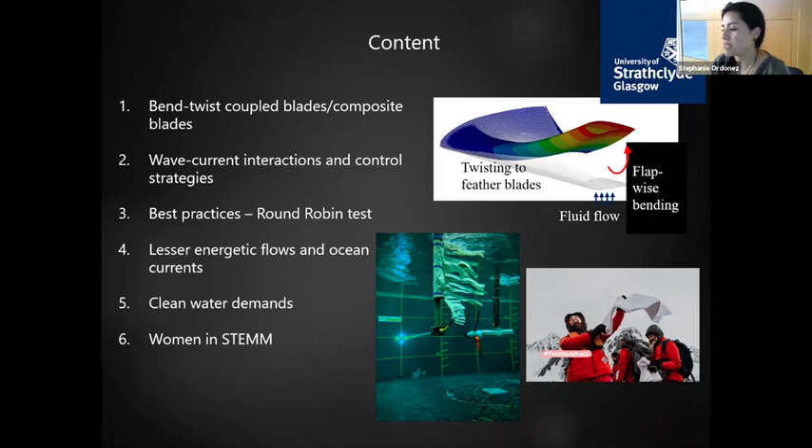So, okay, I guess this picture summarizes what I basically do. I do my research in marine renewables. It's pretty much experimental analysis and optimization of hydrodynamic performance of tidal stream turbines, but also looking at the structural reliability of the devices.

As some of you know, and from what I've heard, I think most of you are in ocean sciences or engineering. There's a few ways that we can convert the energy from the tidal stream or currents to mechanical, electrical energy, right? I work primarily with horizontal axis turbines, three-bladed ones, and we've used a few different ones to assess aspects like dynamic loading and performance, changing the blades, trying to modify them to meet different aspects of what we're trying to achieve.

Well, this is basically what I'm going to talk about. I'm going to start first with a project that we had with a researcher that is now actually at NREL. Dr. Murray did her PhD at Dalhousie, but also in collaboration with Strathclyde University.

Basically what she did was a model to test bend-twist coupled blades. The idea is that instead of having a normal rigid carbon fiber blade or aluminum blade, we are allowing the blades to flap and twist a bit on purpose. In that way, we are trying to shed the load, to increase the reliability and the life of the blade, but without losing a lot of power.

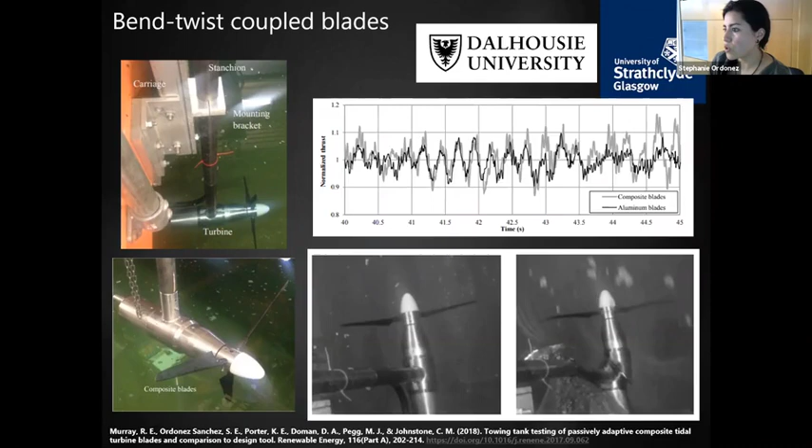This is some of the initial work that we did with Robynne on her bend-twist coupled blades. These blades were filled with epoxy, and it was just some carbon fiber plate. Then we wanted to look at how these blades were operating in wave-current interactions, but also with turbulence.

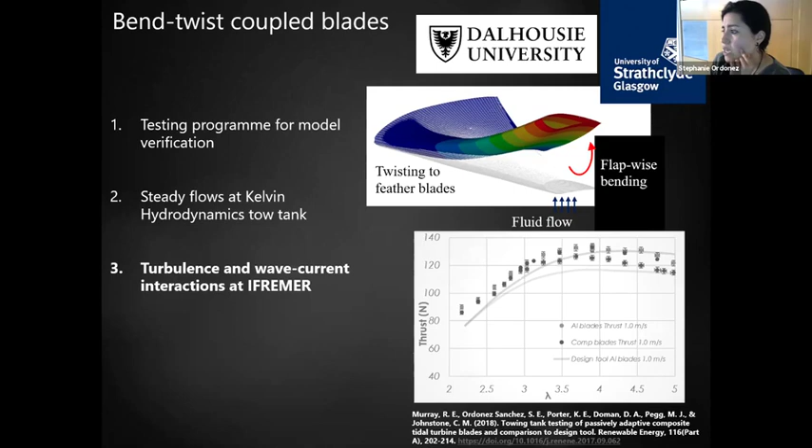For this, the Kelvin Hydrodynamics tank was not the best, because you don't have any turbulence, although you have a very clean wave that you can create, as some of you might know from the tank in your university. So we went to Ifremer, and these are the parameters that we used. Ifremer is a facility in France, in a very nice place called Boulogne-sur-Mer.

If you go, you have really nice French food.

The parameters that we were trying to characterize the turbine with were different wave heights, different levels of turbulence, and different flow speeds. But this is something that we have learned with time. At that time, at Ifremer, there were not a lot of experiments done with waves, and actually the tank is a bit limited when you do waves and currents there.

So we had to set our parameters to a flow speed of 0.8 meters per second, a very, very small wave height of 0.15 meters, and a frequency of 0.5 hertz. So at big scales, it's actually, I think, I don't remember, maybe 1 meter of wave height or something like that. It's not much.

But anyway, that gave us a bit of an insight of what we wanted to get out of it. Again, we want to look at the dynamic loadings on the rotor, but also the change of performance that we can get from a rigid blade compared to a bend-twist coupled blade. And you can see here that the turbine is only 0.8 meter in rotor diameter. And at that time, at Ifremer, they have this LDV.

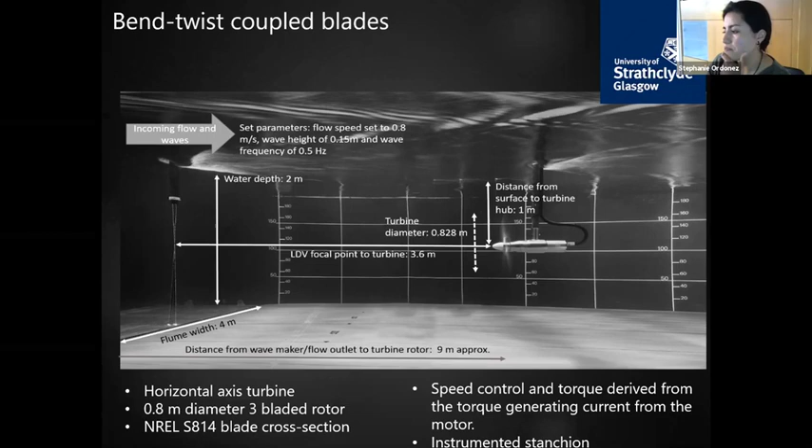And this might not seem the best approach, because the LDV was quite far away from the rotor, but it was something that we were testing, trying not to affect the flows very close to the turbine. And I will discuss this a little bit more later, because it's something that maybe some people working in marine renewables have encountered, that there's not really a lot of best practices of how to go around these issues.

So anyway, these are the results that we got. Basically, you can tell again that you get lower thrust using the composite blades and a bit more with the aluminum blades. And these are the data that we get from the wave-current interaction. For every wave period, we were looking at the fluctuations of the thrust and torque, and the thrust range, so maximum minus minimum of the dynamic loadings, was lower with the composite blades, but also the torque.

And I think it was very difficult to see the advantages of the composite blades at such low velocities, because we did some other experiments at higher velocities, and we could see more the changes on the thrust, so how we were shedding the thrust loading from the rotor blade. We didn't do more experiments, because at that point Robynne hadn't finished her PhD and she was afraid that we were going to break her blades. So we stopped there, but that gave us good parameters of what else we could do.

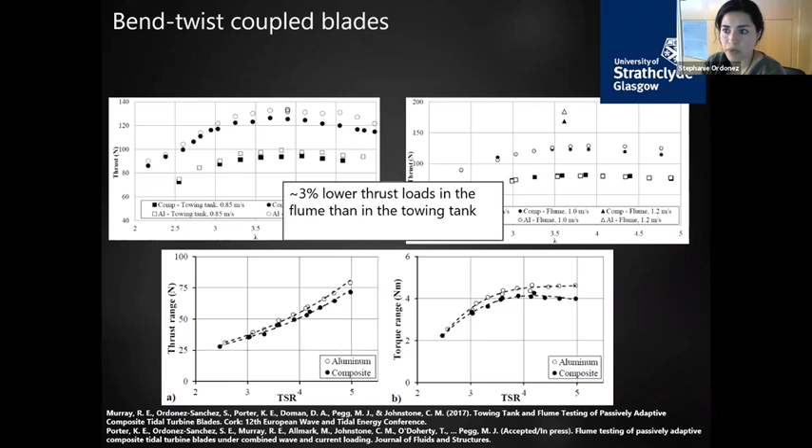We continue work with Robynne. Now she works at NREL, and I will present a bit more on that. She now works with thermoplastics, so that's another area of work that we're currently looking at. So that was a bit on the bend-twist coupled blades. And now I'm going to talk a little bit about hydrodynamic loading on rigid and composite blades.

So this is something that we wanted in parallel to what Robynne was doing, and also to feed into a project called ARICASM at that time, funded by EPSRC, one of the organisms here in the UK. What we wanted to do is a pressure map of the blade, of how the fluid affected the stresses on the blade. Now you can do that with computational fluid dynamics, which is very expensive.

So instead of using computational fluid dynamics, like 3D large eddy simulations or stuff like that, what we tried to do is couple blade element momentum theory with CFD. For those of you who are not familiar with blade element momentum theory, it's a very simple analytical technique where you get the performance of the blade through the computation of thrust and torque.

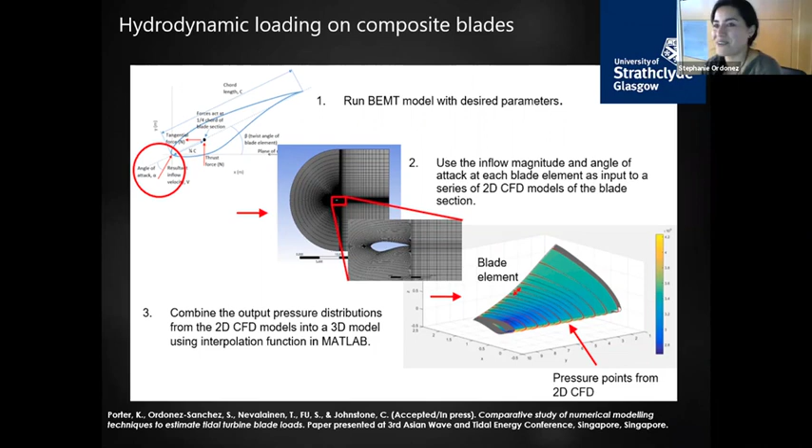But anyway, so this is another area that we were looking at, and what we did is basically get this pressure distribution along the blade, and we compare this. Roughly, we verify it with this. We loaded the blade, and we were getting some surface strain mapping.

So this was done in collaboration with Newcastle. They had the surface strain mapping techniques, and we were just comparing a bit roughly what we were getting in the model and what we were getting in this carbon fiber blade that we had from ages ago when we were testing a turbine that was developed at Strathclyde University. So I'm not sure if you guys are familiar with a contra-rotating marine current turbine. It's called CoRMaT.

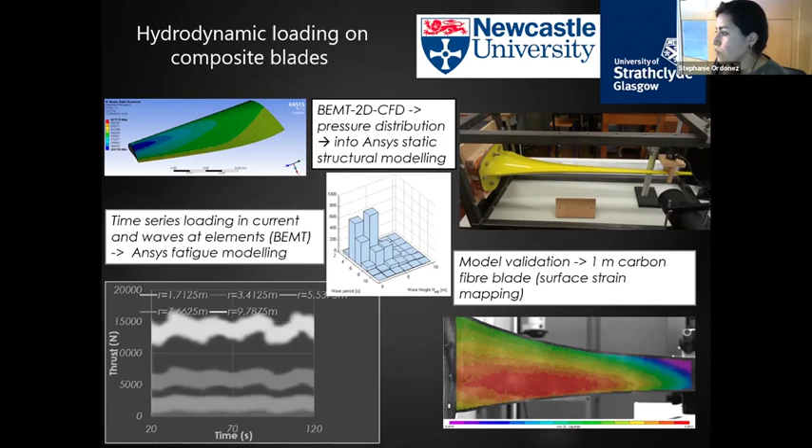Sorry. And then, so basically we did that work with Newcastle, and we came up with these models. And I think, well, they look nice, no? I don't know if this is very useful, but they look at the different pressure distribution along the blade. So basically this is a hollow blade with a structural support, you can see here. And what we are fitting into the model is a regular wave, and it's only 2.6 meters of wave height and a period of 6.1 seconds.

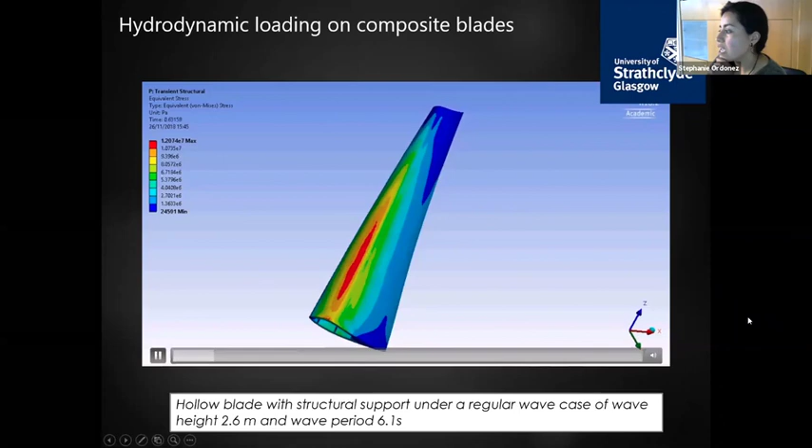We did a more extreme case, which is again the same blade, but this is under 10 meters of wave height and a wave period of 10.06 seconds. So obviously this helps you to look at more like fatigue analysis of blades and looking at different compositions of materials, like glass fiber, carbon fiber, different layers, different directionality of the fibers, and so on.

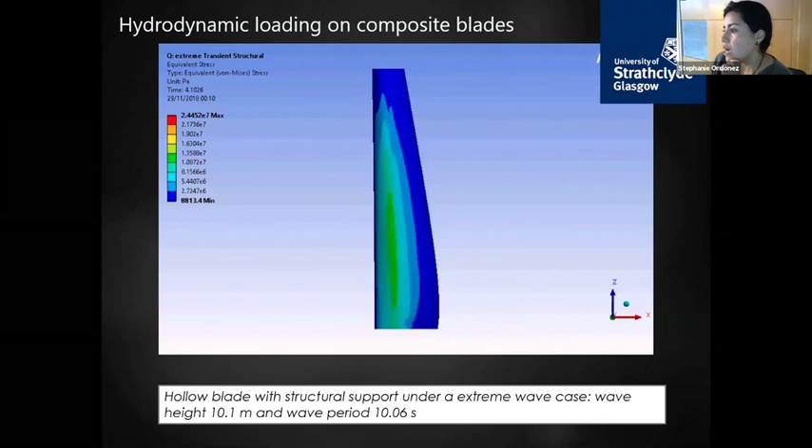And basically what I was telling you about was an extension of this work that's been done with NREL and Cardiff University as well. So we were looking at the use of thermoplastic resins, and this is basically just to improve the saturated properties, and the mechanical properties can be recovered after being dried, and also the recyclability of the blades. So there's a lot of now life cycle assessment, carbon footprint, and what we can do with this when basically the lifetime of the blades expires.

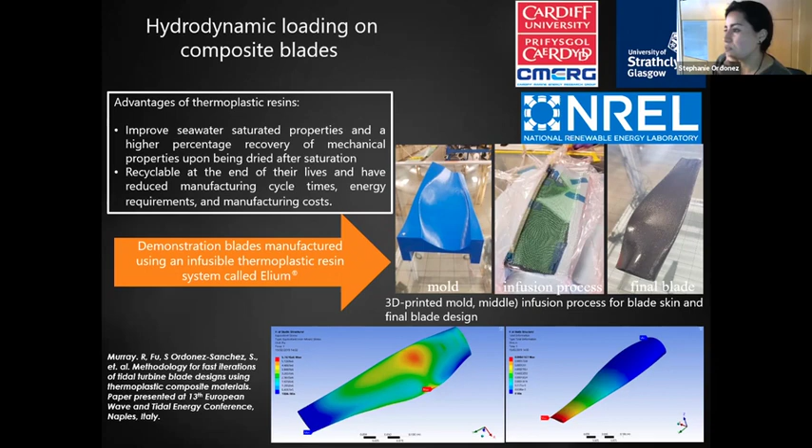So there's actually some work in Strathclyde University of one of my colleagues who's looking at the recyclability of carbon and glass fibers. But this is something that we are doing with Robin, and in fact we were going to test some of these blades, but the COVID situation happened, and now we have stopped a lot of our experiments that we had planned for last year. But anyway, that's my excuse.

And well, I'm going to talk now a little bit about this project that we had in collaboration with Cardiff University. It was a 4-year project called DyLoTTA, and basically it's called dynamic loadings in tidal stream turbines. So the idea of this project is basically, again, assessing dynamic loadings of an array of turbines, actually. So for this project, we had 3 turbines, again, horizontal axis turbines. We developed this blade, which is based on a Wortmann cross-section, and again, three-bladed rotors, but differently from the turbine that I presented before.

This is better instrumented. So basically what you can see in this diagram, we have a load cell here that measures thrust and torque behind the rotor. And again, we try to avoid any parasitic loads of friction or so, try to get as real data as possible. We have all the bosses where the blade sits on. They are also instrumented with strain gauges. And we are measuring here axial and tangential forces for each of the blades. Now, we also have the encoder, and we are able to use the 2 control strategies. So speed control and torque control, which is something that we also wanted to look at in this project.

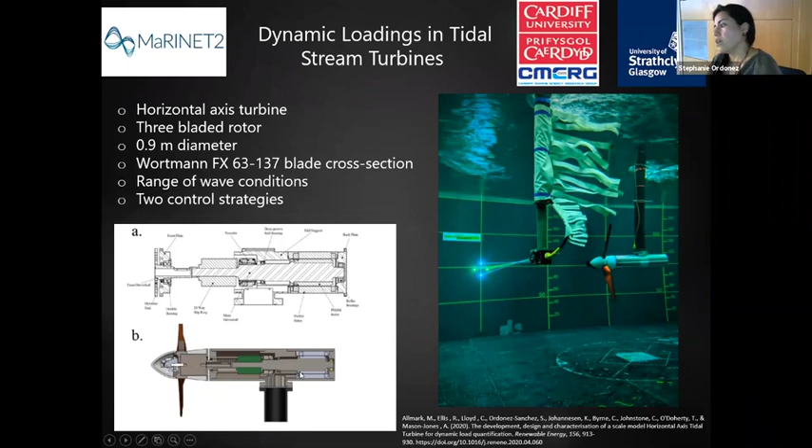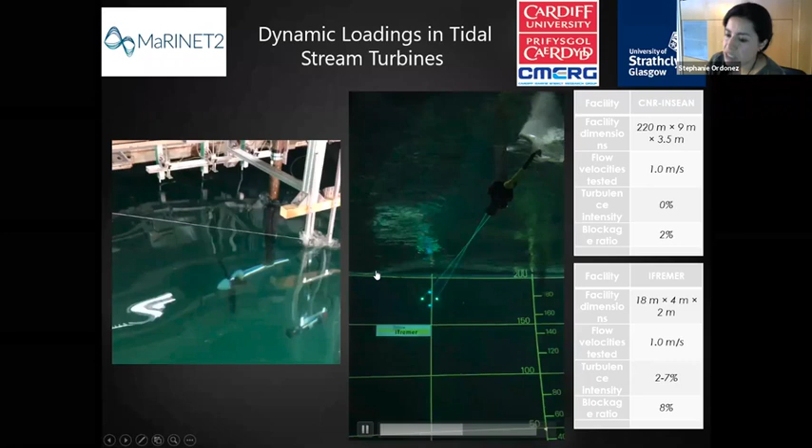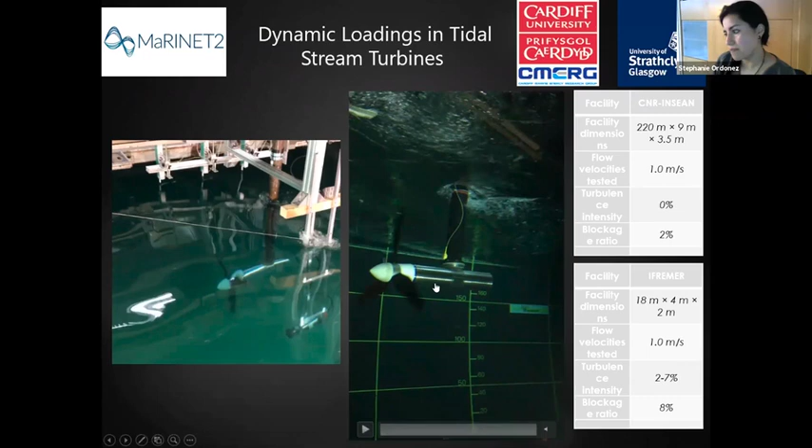So in this one, again, you can see here the waves that we were creating. Obviously there's advantages and disadvantages of using these 2 facilities. On the one hand, you get more realistic flows in the flume rather than in the tow tank. But then again, you have some limitations in the flume tank that you don't have such clean data as what you get in the tow tank. But I guess it really depends what you want to get out of it.

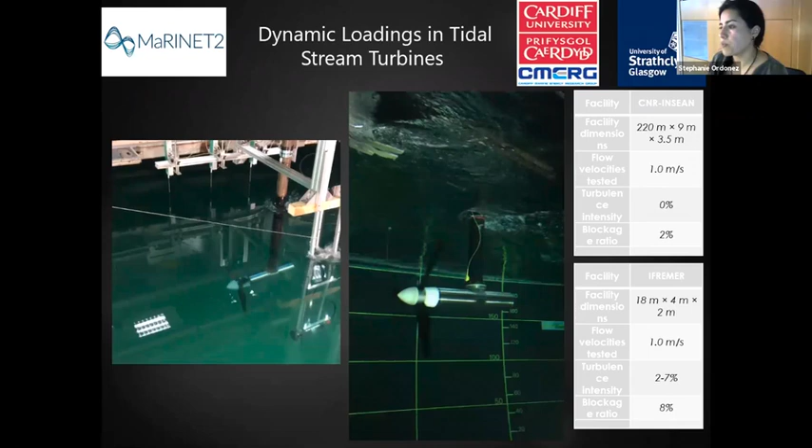Again, as we were expecting, we see an average thrust range increasing with the wave height, but this was seen much more with the torque control, and these are at the same operating conditions.

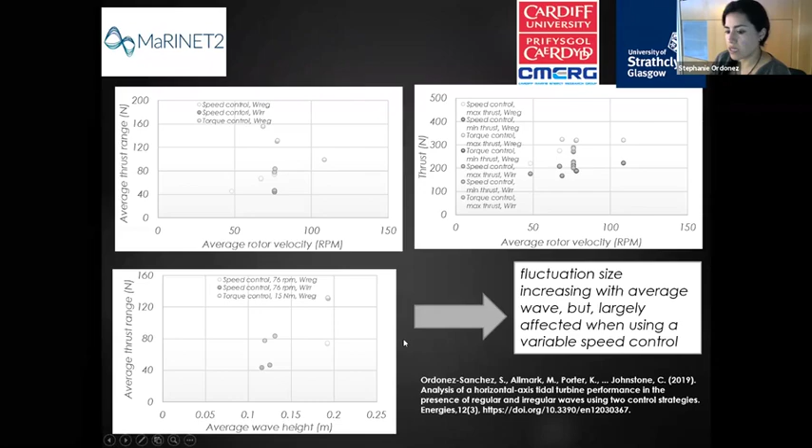This is another aspect that we were looking at, which is the phase difference. So basically we saw a phase difference between the surface elevation, so the wave, and the thrust loading. And what was interesting, obviously we get the phase difference for both techniques, the torque and the speed control. But we see a smaller difference of 5 to 10 degree phase difference with the torque control.

And again, that's important because I've tried in some cases to understand what happens with the rotor if you get all the data from, let's say, a wave gauge or so. So if you can actually infer the data from the other oceanographic parameters, like waves or turbulence, I think this phase difference might be quite relevant to try to correlate these loadings and this time series.

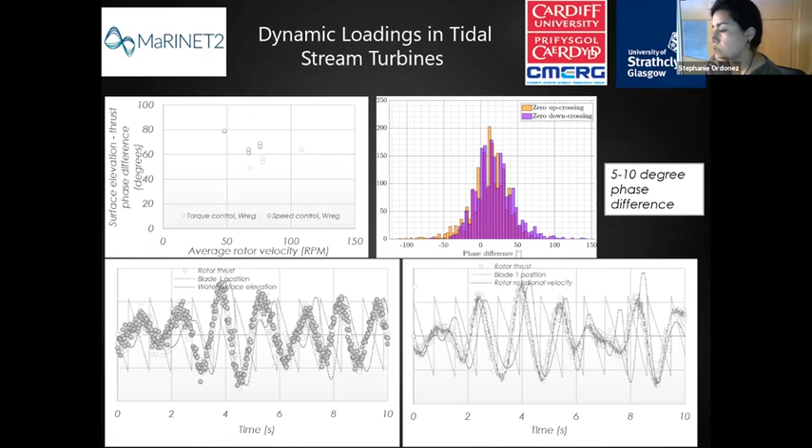So this was part of what we got in Ifremer and in the tow tank and flume tanks, sorry. And this is kind of the last part that we were able to do. So this was some array interactions that we wanted to do. This is in the FloWave facility in Edinburgh University.

So for those of you who have not seen it, basically it's a massive pool of 20 meters of diameter. I think the section where you test is 10 meters or so, but you can get currents from all directions, waves from all directions. And it all sounds very good, but actually when you try to do a test there it's a nightmare, because the flows are really hectic.

So we did a bit of testing to look at the lateral spacing and downstream spacing between turbines to see what the wake effects are. And this is relevant because when you go into the field and you want to install a lot of tidal turbines in an area, you want to maximize the power output, but also you want to reduce the amount of loading that you get in the turbines. So that is something that we were trying to look at.

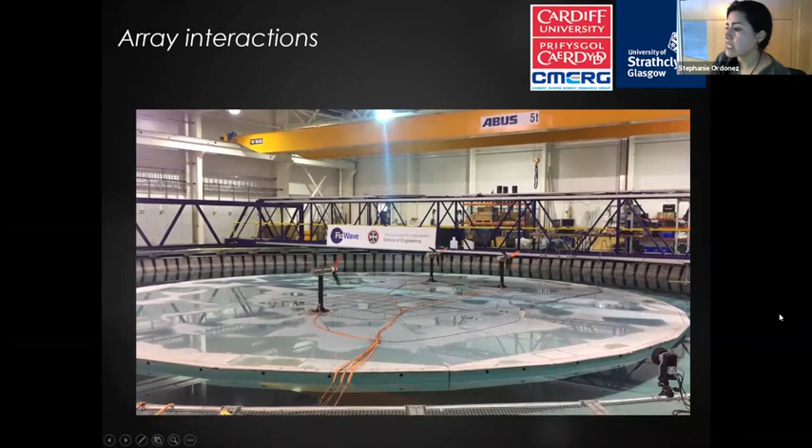For example, if we put the turbines closer together, then you get a higher acceleration between the turbines, but that is going to maybe affect this one. There are studies that show that they increase the power output, but also obviously the structural integrity of the turbine is damaged. I put the other video because here you can't see anything.

And some of this data we are going to present at EWTEC. I don't know if some of you are familiar with it, the people who are in the renewable energy or offshore renewable section might be. So the results from this data are going to be presented in September, so I'm not going to talk more about this.

And before I jump into the next topic, I don't know if you guys have any questions, because I'm aware that I'm running out of time. So just in case you want to comment something or have questions.

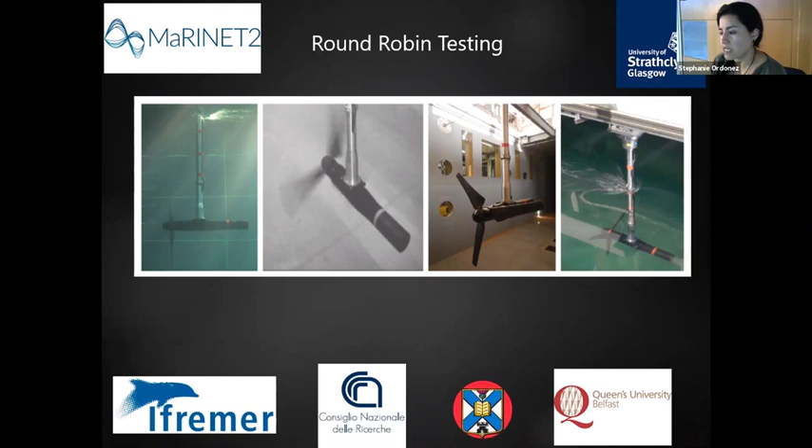So basically, even if you are in the US and you want to go and test at some of the tanks that I've shown, you can put your application and obviously your proposal is reviewed and you can get access. But it's not only about access, it's also about training, because there are some online training courses. And I guess the research aspect of this Marinet project is about round robin testing. And it's round robin testing of different concepts. So it's wave energy, offshore wind, tidal energy, and components. So it could be mooring lines, electrical cables, etc.

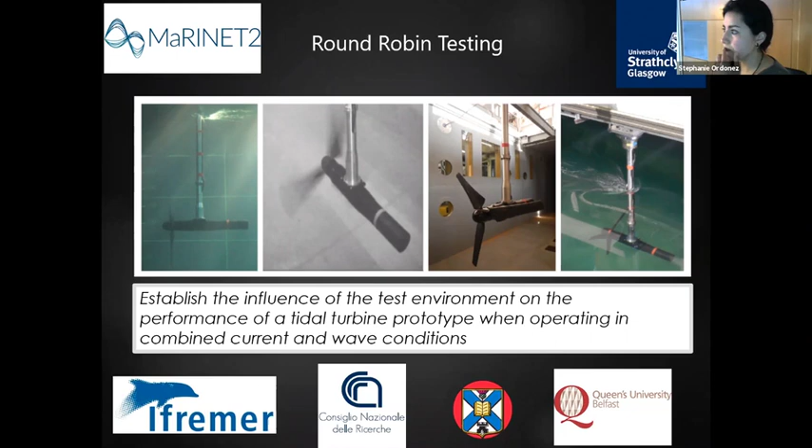And the part that I'm more involved in is the round robin testing. So basically, what we're trying to do is use the same turbine and take it to different tanks, put the same parameters, and test if there's an influence from the facility on the results that you obtain. And also look at the best practices or establish any best practices. As I said before, because the technology is still quite new, there are not certain standards that many people follow, or some people follow one and others the other, and there's not really a consensus on which one is best. So this is the round robin testing.

So here we are using the turbine that was developed by Ifremer, an organization in France. And in fact, this turbine is very well instrumented. So again, it has a torque thrust load cell behind the rotor, but here at each blade root it has a 5-axis sensor to get a more comprehensive analysis of the blade root bending moments and forces. And so what we did with this testing was to have the same turbine in all facilities, but also the same equipment, like at least one wave probe and the ADV, which was going to come to all the facilities to test the same program.

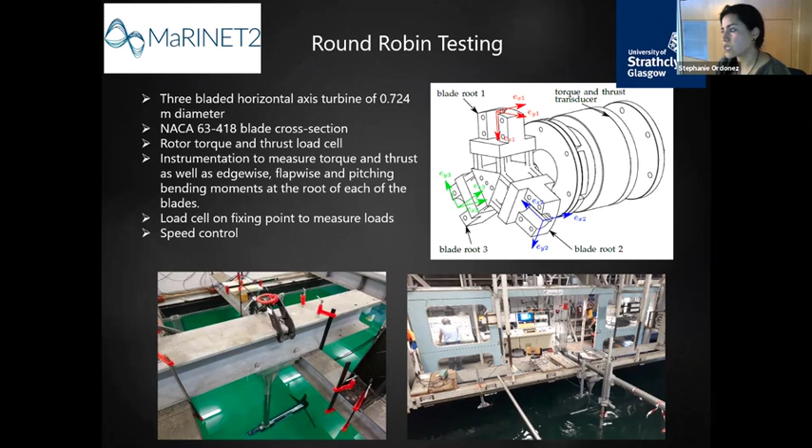I forgot to put the diagram of the instrumentation that we had, but basically it's similar to what I've shown before. And these are all the cases that we tested. So we tested 2 current-only cases, but we also tested waves, regular waves, and an irregular wave. And this is the flow characterization of 3 facilities. Again, we haven't been able to finish the testing because of COVID. But you can see here the tests that we have done at Ifremer, a tow tank in Italy, and the FloWave facility.

And you can see here the profiles, the velocities in the water column of each of them. From the tow tank, where you don't have any turbulence effects, basically what we did was to put the ADV and run the carriage to get these points without the turbine in place. And then we set the same ADV in FloWave and in the other facility, and you can see here the massive fluctuations that we get at the flumes, like Ifremer and FloWave.

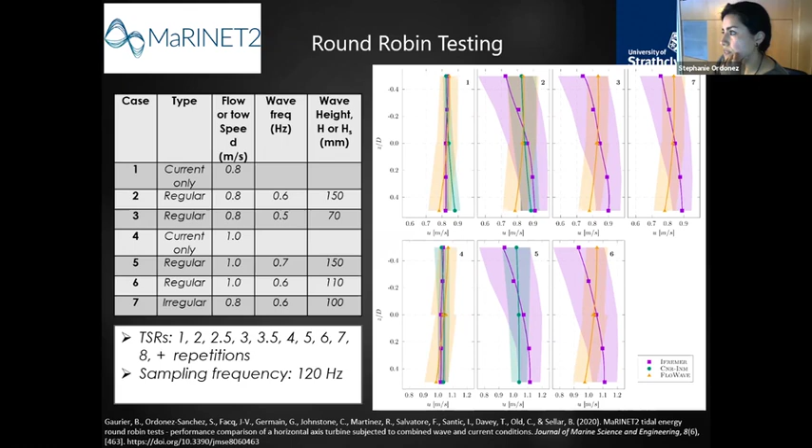So this was the first part of the testing, and obviously we wanted to look at the operational curve. As I said before, it was the CP and CT curves, so the coefficient of performance and thrust coefficient. And basically what we've seen is actually quite similar average data if we look at the whole data sets. And we can see a bit of difference with the FloWave facility.

And I think the problem with FloWave is that there's something we use called blockage correction. Maybe some of you have heard of it. Basically, we account for the dimensions of the tank, the cross section, against the size of the turbine. Obviously, the bigger the turbine, the more of the tank you use, and you have a lot of effects from the blockage that you are imposing on the flow. And the problem is that the same function we use for the blockage correction for the tow tank and the flume tank at Ifremer, we are using for FloWave, but that might not be the same.

I mean, it might not be the best approach, because obviously FloWave, you have again the same cross section, which is only 2 meters in water depth, the same as in other facilities, but it's a quite wide facility, no? So I think we have to learn from this and apply other blockage corrections for this type of facilities. And there's a lot of people in Oxford actually working with blockage correction factors, and it's something that I think we will do in the future.

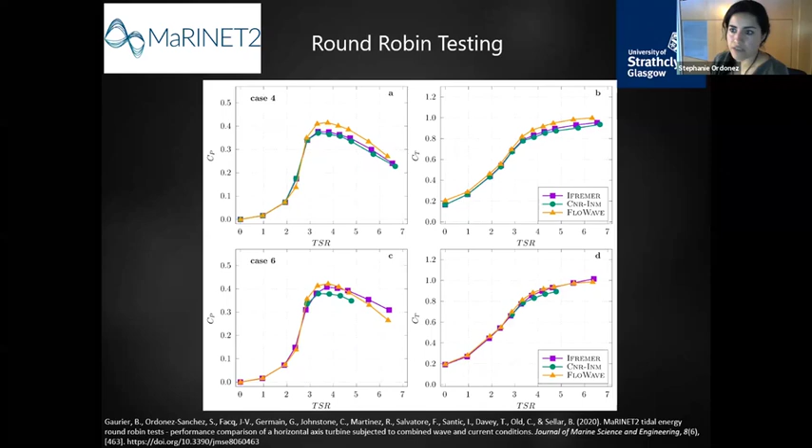At this stage, it was basically looking at the flow characteristics, performance of thrust and the power, and look at the overall power of the device now. So I'm going to just flip through this quickly because I'm aware of the time. And just another, I guess this is important for best practices. We were looking at the uncertainty, obviously, of the data.

So you can see here that, again, the data from FloWave seems to give us a bit more of uncertainty just because of the type of flows that we were getting. So again, it's not much. The maximum value that we got from the combined uncertainty was about 4%. So it's not much for the thrust. And in fact, a bit like 6 or 5% for the torque data. So we still need to do that for the blade data.

But we also see here the convergence of the thrust data for the whole time we were recording the data. So I think, I don't remember. Yeah, so it was at 250 for all the facilities, except for the tow tank where we actually used a reduced amount of time, just because, you know, we have steady flows.

So basically, this is part of the round robin testing, and we're still looking at the data, and we are aiming to test this turbine again in the tank that we have at Strathclyde University, so finalize with another tow tank, but also taking it to another place in Northern Ireland, which is called Portaferry. So that's where SeaGen, one of the most well-known turbines, was installed for 5 years or so. And they have very nice tidal stream.

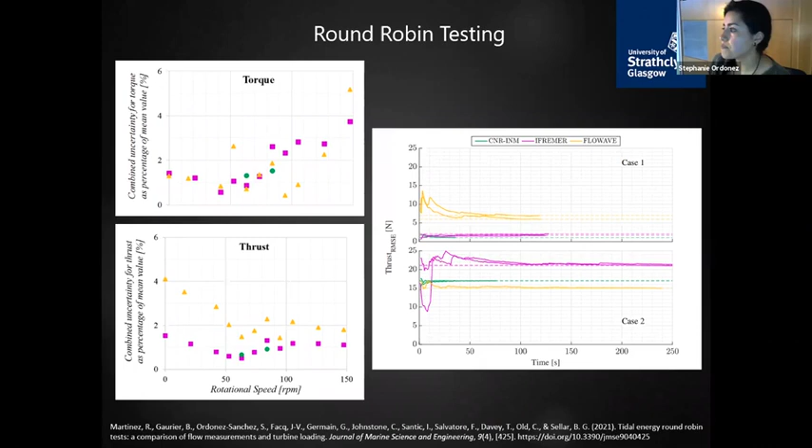So for those of you who have been to Mexico and have been to Cancun, you know Cozumel Island is very close to Cancun. And it's very touristic, you know, for the people who like to dive and to snorkel. You have a lot of marine life. But also you have this continuous current that is not really affected by the tide.

And we wanted to see what would be the possibility of using this current to meet the demands of Cozumel Island. So even though Cozumel Island doesn't have a lot of population, I think it's maybe 100,000 people, maybe less, they receive a lot of tourists, and there could be even 2 million people coming to the island at some point. And obviously, the only source of energy that they have is a cable that runs from the mainland to the island, and the rest is produced by diesel generators. So obviously, it's not very good for the environment.

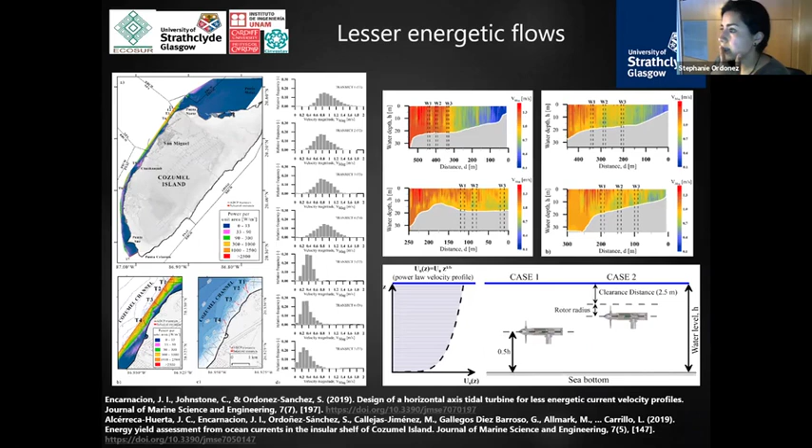And just to show you a little bit of the resource that we have, from the ocean currents to the tidal flow. So this is data from a tidal site in Orkney in the north of Scotland compared to the ocean current. So obviously, we get a higher percentage of occurrence of a flow, even though the velocity is quite low. It's only 1 meter per second compared to what you can get in a tidal site, which is 3 meters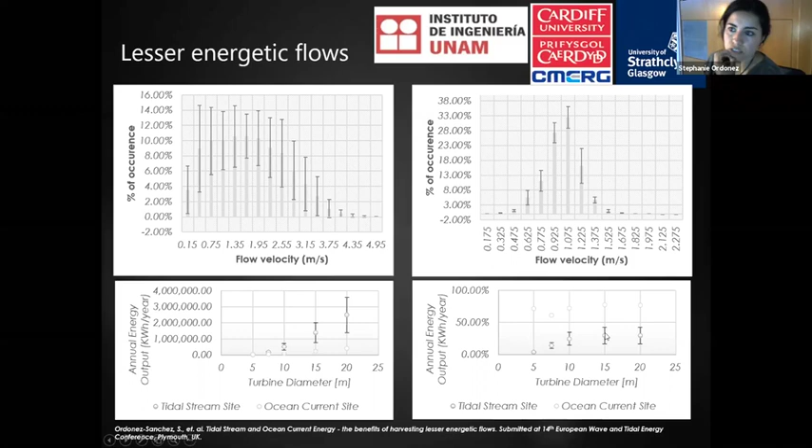per second. But when we were looking at the annual energy and capacity factor, we get a quite high capacity factor, about 70%, compared to a tidal device that is only maybe 30 to 40%. So obviously there's opportunities there for the people of Cozumel to use this energy. And we were looking at what would be the best rotor diameter that we could use to minimize the levelized cost of energy.

And you can see here, I'm really running late, but I will finish in a minute. So we can see that for an ocean current, the sweet spot would be working with turbine diameters of 5 to 10 meters, according to an initial evaluation. We have made a lot of assumptions for this. And for a tidal site, it's better to work in a region of maybe 10 to 17 meters of rotor diameter, which is basically what is now being commercialized.

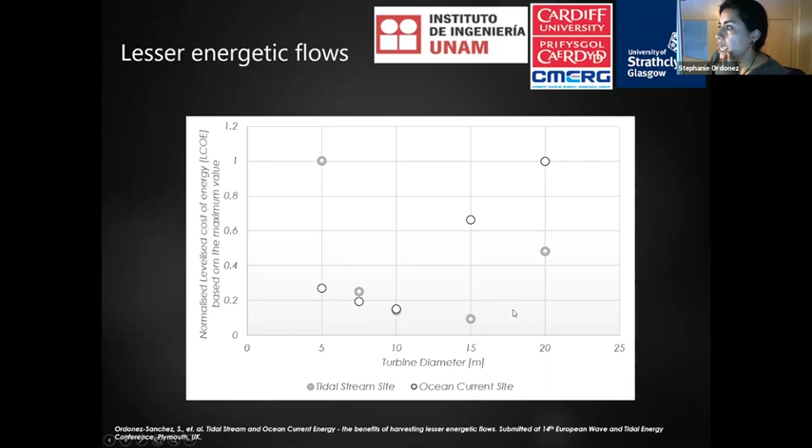And then I'll just go very quickly through this because I really want to go to the last slide. Another thing that we are looking at is the clean water demands with tidal energy. So instead of converting the energy to an electrical load, what we want to do is to use that rotor dynamic energy to directly feed into a high pressure pump to drive a reverse osmosis module, so not using this tidal technology to produce electrical energy, but to produce clean water.

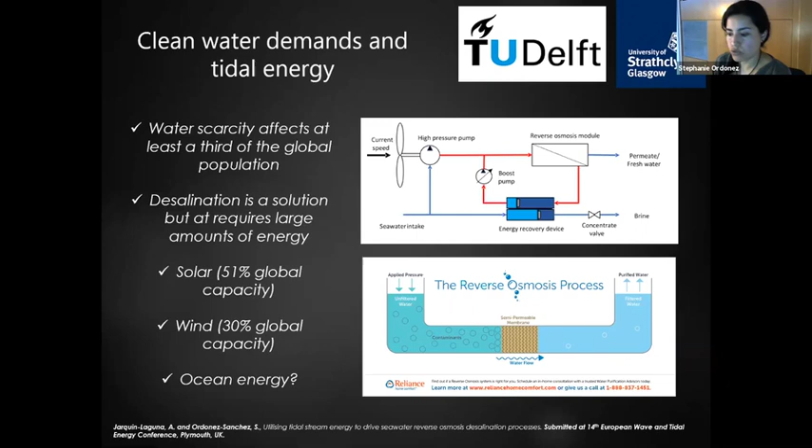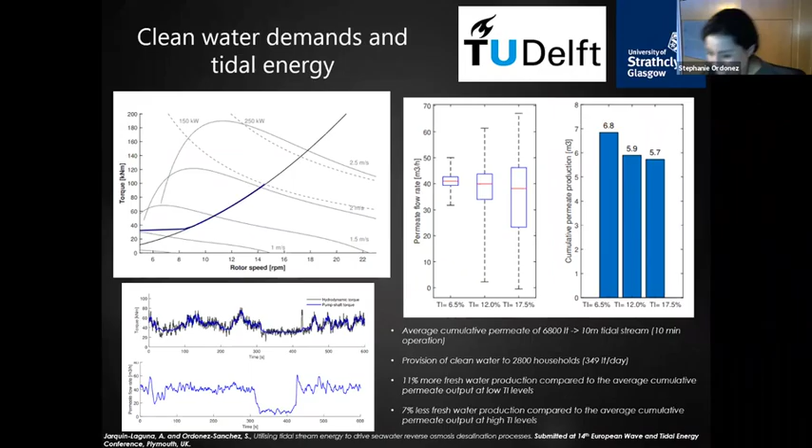So that is something that I'm doing with Delft University. And this is some initial data that we're going to present at EWTEC again. So what we find is that for a 10-meter tidal turbine, we can provide clean water for about 2,800 households using an average household rate of 349 liters a day. And just to finalize, very quickly, I really wanted to mention this because I

think it's really important, especially for all the women here that are very good in science. I've been involved in this initiative called Homeward Bound. It's an Australian initiative to empower women that work in STEM subjects, and to help combat climate change. It's a 12-month leadership course. It's open to basically any women above, I don't know, 20 years old who's working or at university or doing a PhD, but it has to be related to STEM, and it's even better if it's related to climate change and the environment.

And basically you apply, and it's an amazing experience. What the initiative is trying to do is to build up a network of 1,000 women over 10 years, to empower them to be in key role positions, to give our points on climate change and what the strategies should be. So here I provided a link where you can see the video of what Homeward Bound is about, or you can ask me questions about this afterwards, because it's a great opportunity for you guys. If you're interested, I'm part of the sixth cohort, so there's going to be 4 more cohorts.